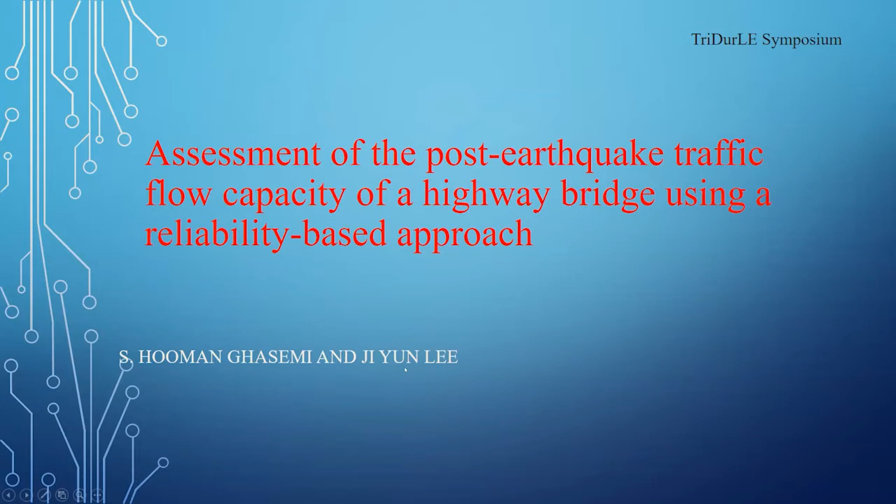Before starting, let's get started with some facts about the problem statement. As you know, bridges are very important and vital structural components in transportation networks. If there is damage to the structures, by the falling of bridges, there is a possibility of failure to the networks. That's why we need to determine what is the remaining load carrying capacity, or traffic load carrying capacity, after a disaster. So the main question here is to find the relationship between traffic flow and structural failure.

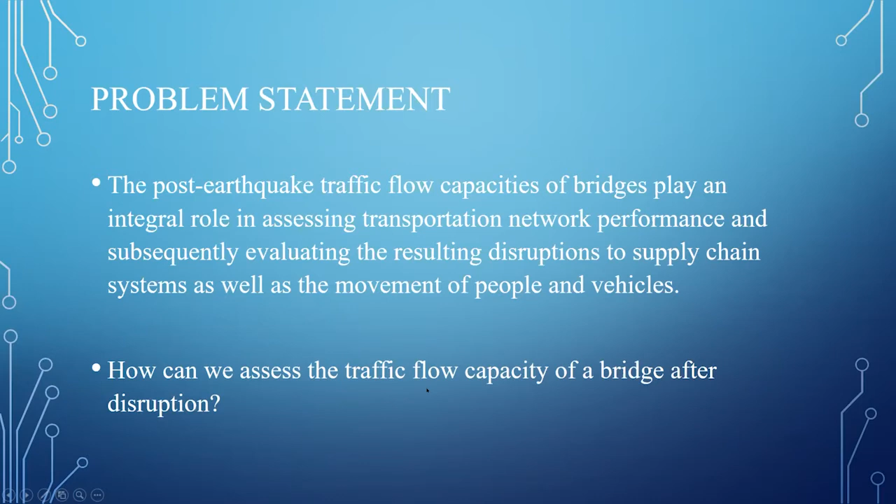In this study, we are trying to follow three main goals. The first goal is to determine a new kind of damage index. We already used fragility curves; however, here we are trying to introduce a new type of reliability intensity surface to determine the damage condition of the structure during or after a disaster. Then, using that reliability intensity surface, we can determine a new relationship between the load carrying capacity and the remaining traffic flow capacity of the bridges.

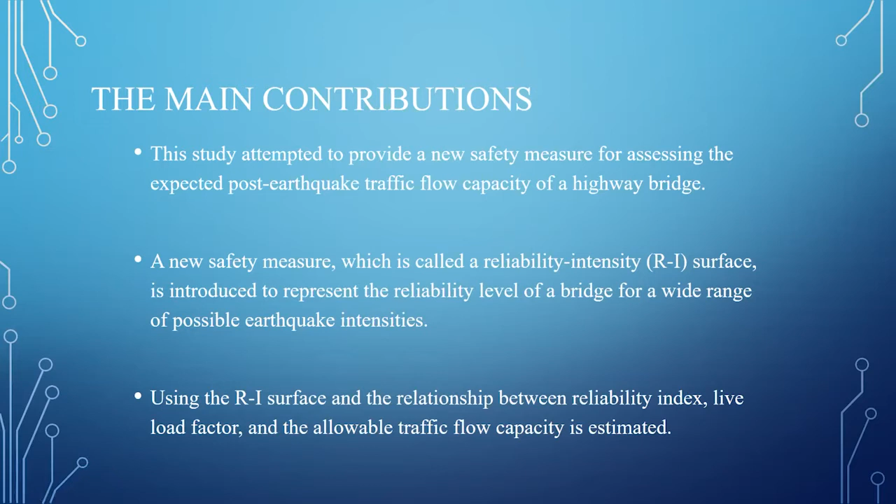Also, by consideration of probabilistic seismic hazard analysis, we can determine a new type of resilience metric to measure the capacity of the networks.

As you know, the seismic event is an uncertain event. We need to determine the mean and standard deviation of that earthquake event to measure the intensity measure. With consideration of the probability aspect of earthquakes, we can find a joint distribution function between the probability of the earthquake happening and the mean and coefficient of variation of the earthquakes.

Then we can generate that reliability intensity surface to determine the remaining load carrying capacity of the system. With consideration of the relationship between that reliability index and flow capacity, we can determine what is the expected post-earthquake traffic flow.

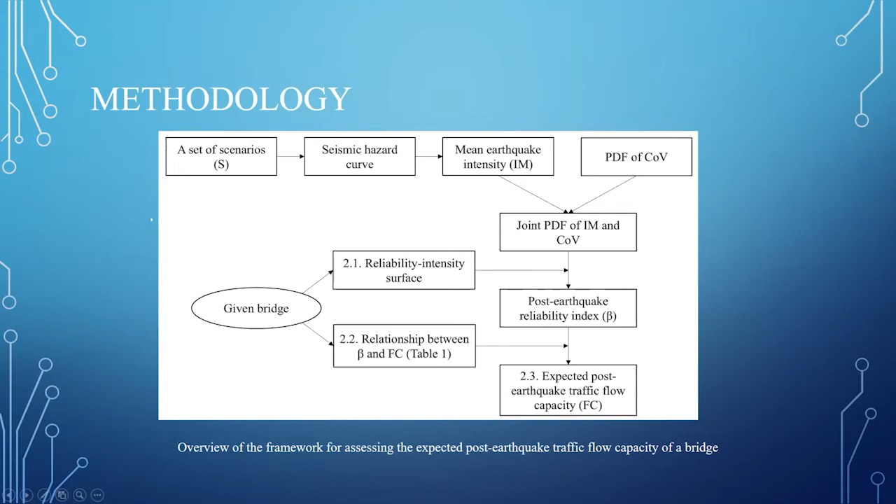So why are we focusing on the reliability intensity surface, and what is the advantage of that reliability intensity surface, which could be considered as a new toolbox for identifying and quantifying the damage of the system? In comparison with our conventional or traditional methods, which are the fragility curves, there are some shortcomings to the fragility curves.

The first one is the consideration of the distribution in fragility curves, based on the fundamental idea of the fragility curve. The fragility curve idea relies on the log-normal distribution. That means the failure probability of any event using the fragility curve should behave as a log-normal, but that's not true. Some resistance or load distributions do not follow the log-normal distribution, and as a result, your failure probability distribution is not log-normal forever.

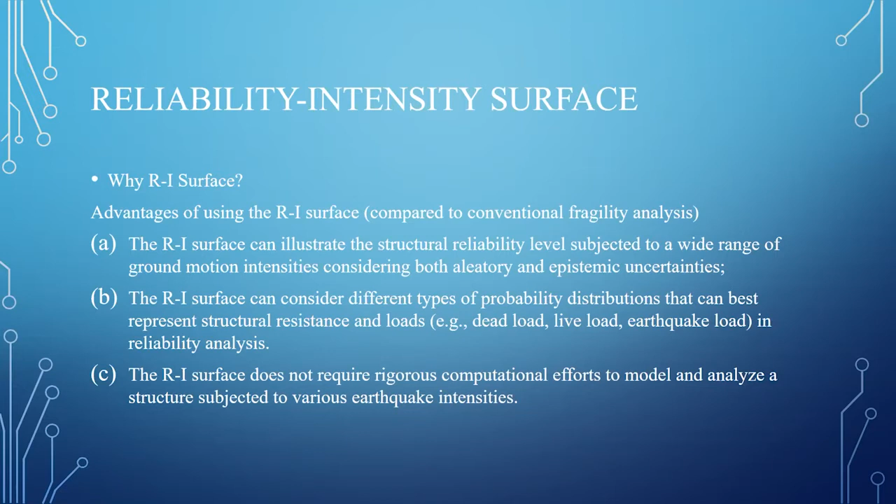So that's why we need to consider the real probability distribution function for the failure. The other reason we are using the reliability intensity surface is that events like earthquakes have various types of uncertainties. We need to consider both aleatory and epistemic uncertainty. Also, using the reliability intensity surface, we gain a better understanding of the sensitivity analysis between the load and the structural load carrying capacity, or resistance.

So the idea of finding the load carrying capacity, or determining the reliability index of the system, is established based on the limit state function. On the left side, you see the basic expression of the limit state function, which is just the difference between the resistance, or load carrying capacity, minus the load. Both R and Q stand as distributions.

If you take those distributions into consideration and put them into the limit state function, you can find the failure zone. Those solid lines on the left side, top figure, refer to either the distribution of the load or the distribution of the system.

In this research, we try to develop a new way to capture the reliability index by modifying the limit state function a little bit.

Previously, to find the reliability index of the system after a disaster, let's look at the top left figure. That dashed blue line refers to the distribution of the resistance before disaster, called the intact system. By applying forces or extreme events, the load carrying capacity decreases, so the resistance shifts to the left, resulting in more failure.

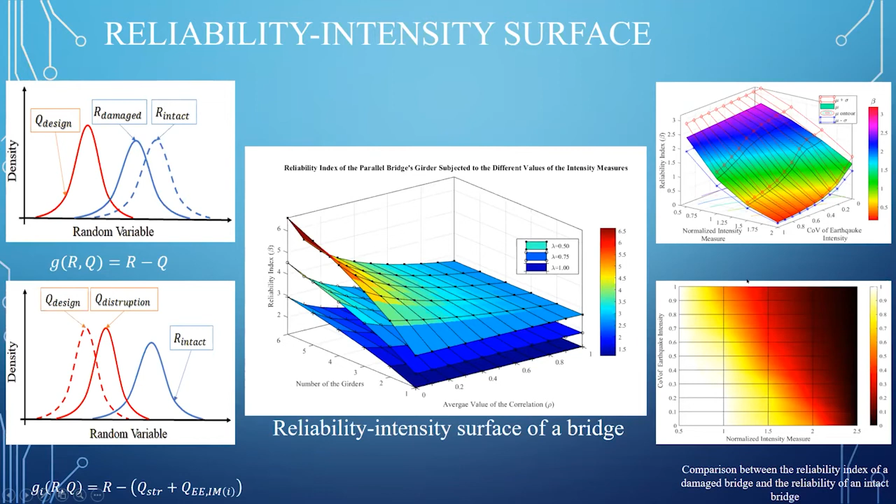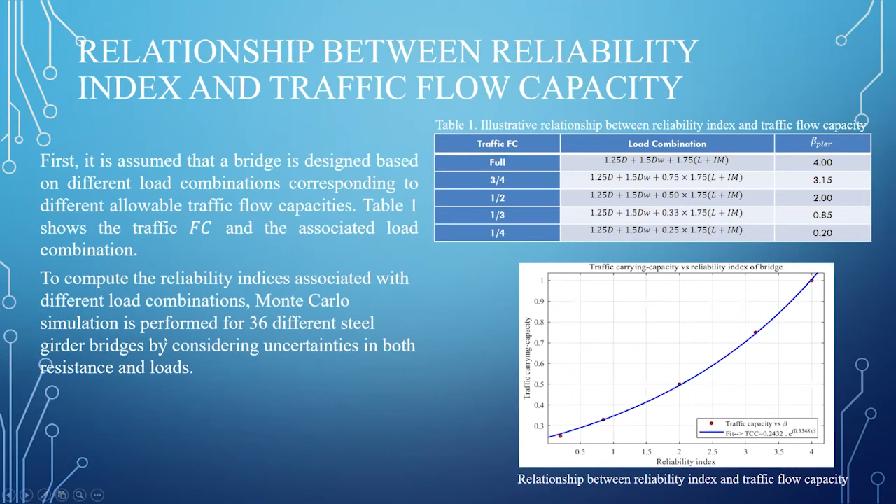So therefore, we can make a relationship between the live load and the required reliability index. As I mentioned, for the full load carrying capacity, you need a reliability index of about 4 to bring enough stiffness and safety to the bridge.

The next step is to quantify the expected flow capacity for the bridge. That probabilistic illustration and expression helps us determine the expected value.

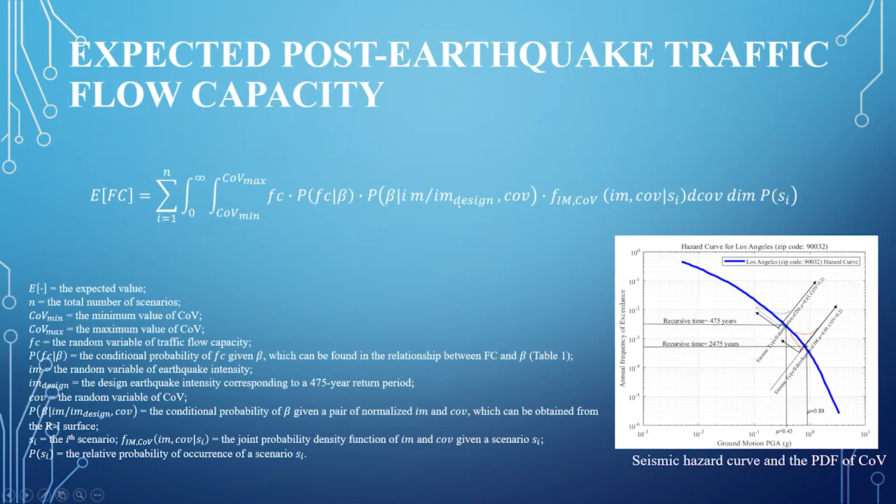In that equation, P_SI refers to the probability of seismic events, and the rest of the probability distribution refers to conditional probability with concentration. For example, F sub IM COV refers to the probability of the intensity of the earthquake with concentration of a given scenario. Also, the middle part is the probability distribution of the reliability index with that given COV intensity measure, and so on.

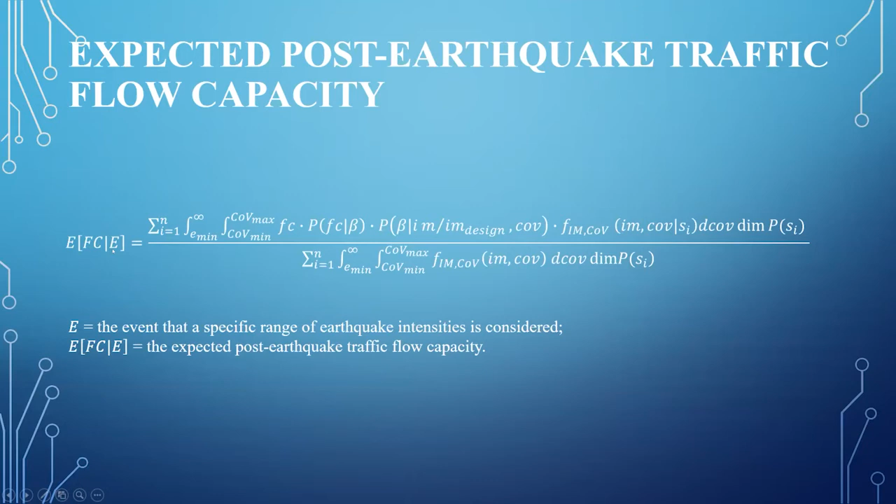And accordingly, we can find the flow capacity of that bridge with respect to a given extreme event.

In order to make that idea clear, let's take a look at an illustrative example. Let's assume we have a network between city A and city B. We have different types of bridges with 3, 4 piers or so, which have different reliability indices, and it was assumed that bridge B1 was located at the given location on the table. This is a very imaginable kind of example.

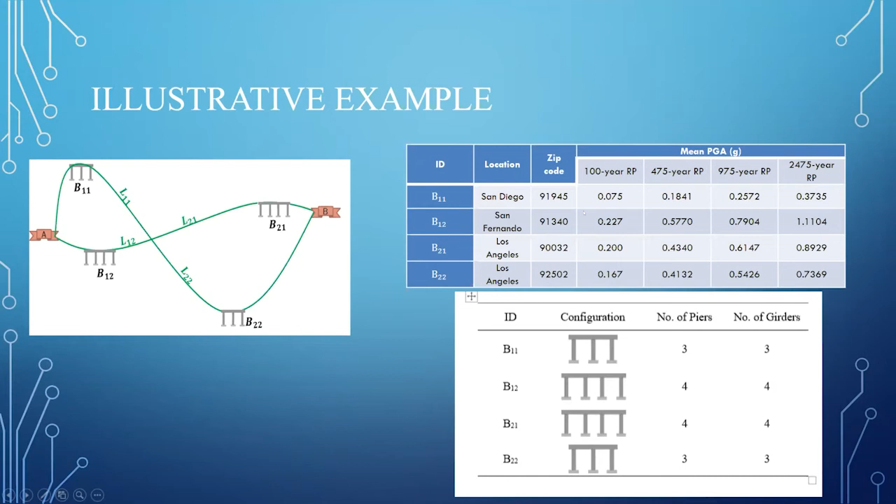For each location, we have information about the return period of the earthquake with the corresponding intensity measure. The intensity measure considered for this research was peak ground acceleration. So we can derive the seismic hazard curve for the given bridges. For example, for bridge number 1, 2, 3 and 4, we have different curves, which can be taken from the USGS website.

You can also take the uncertainty of the PGA of any earthquake event into consideration. For this study, we are assuming that the distribution of the uncertainty of the earthquakes behaves as an extreme type 2 distribution with a COV of 0.2.

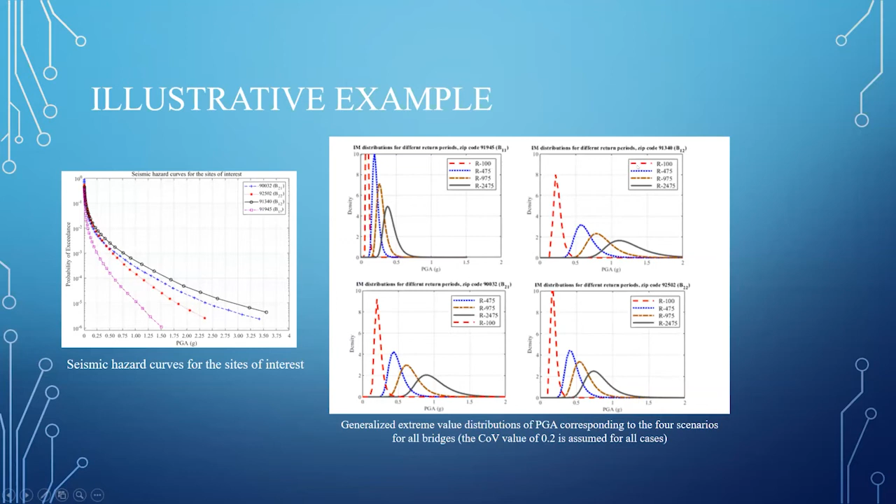So for each different location, you can get various types of probability of happening with consideration of different return time periods. Accordingly, you can find the reliability intensity surface for piers, girders, and bent cap. We have assumed that those bridges for those locations are highway bridges, which have 3 main structural components: girders, bent cap, and piers.

The piers could be treated as a parallel system. Girders are also going to be a parallel system. The bent cap is just one single element. And all elements could be considered as a series system. So using system reliability, you can eventually find the reliability intensity surface for bridges.

The blue mesh on the bottom figures refers to the reliability intensity surface for the bridge after disaster. The colorful surface on top refers to the reliability intensity surface for the bridge before disaster. One axis refers to the number of piers, the other refers to the correlation between the elements. So by having the number of piers and different correlation, you can find the reliability index of the bridge before and after disaster.

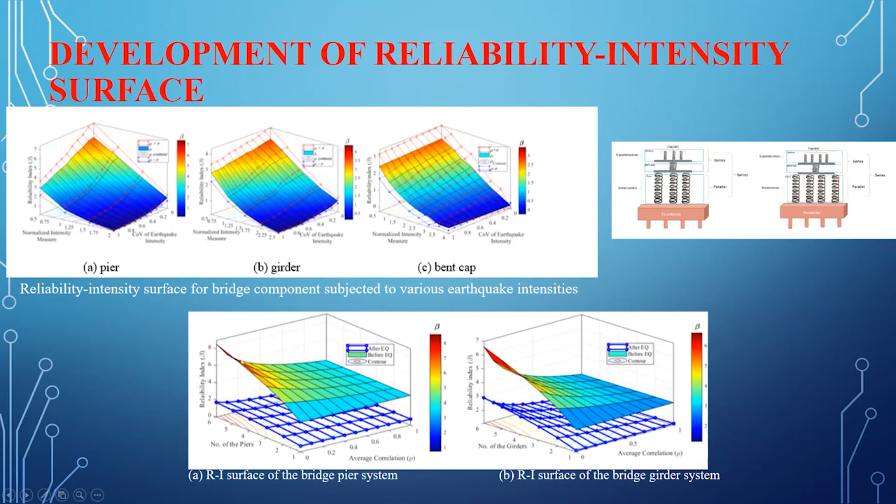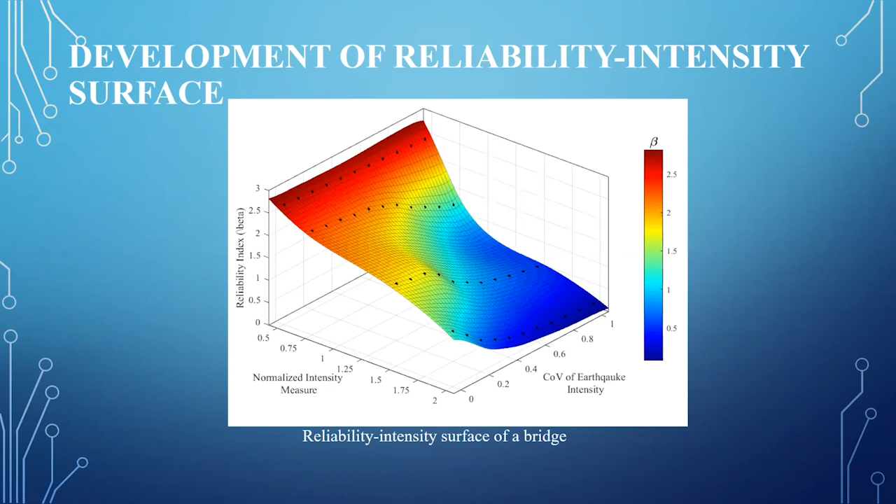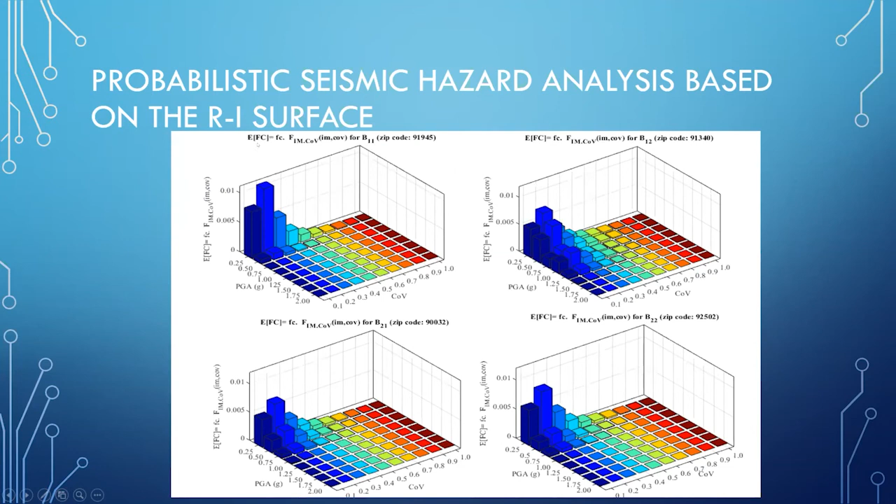Using the system reliability approach, you can derive the reliability intensity surface for the entire bridge after or even before disaster. Then we can use that proposed equation to determine the expected flow capacity for various locations, and accordingly find the expected flow capacity for a given earthquake scenario.

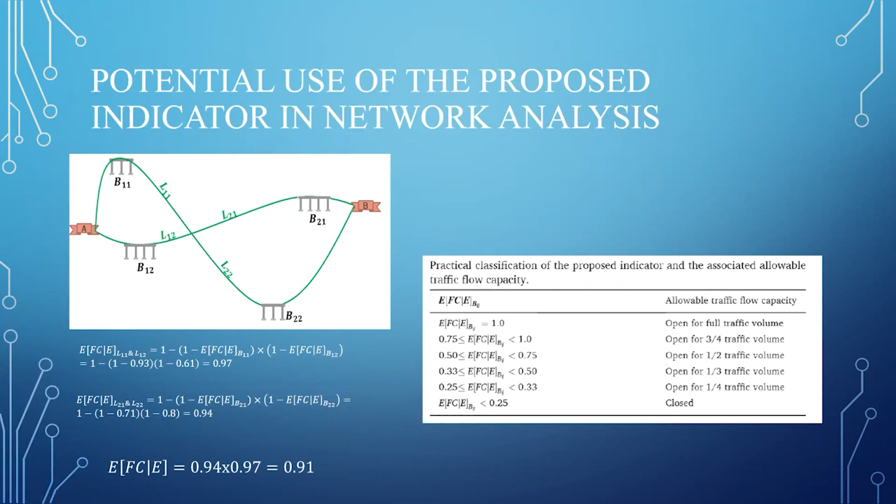For example, if the expected value from the probabilistic equation equals 1 after disaster, you can claim your bridge system, your transportation system, has complete load carrying capacity and traffic flow. If that expected value falls between 0.75 and 1, the allowable traffic flow after disaster is just three quarters of what it was before the disaster, and so on. If the expected traffic flow with that given condition is less than a quarter, you may put a sign after disaster and not use that bridge, because there's a high possibility of failure.

As a conclusion, this study proposed a new reliability intensity surface, which is a powerful probabilistic approach to determine the remaining structural safety or condition of the structure after disaster, which could be used as an alternative to fragility curves. Accordingly, we introduced a reliability-based indicator, and using probabilistic approaches, determined the expected traffic flow, and proposed recommended values of the expected traffic flow with respect to load factors.